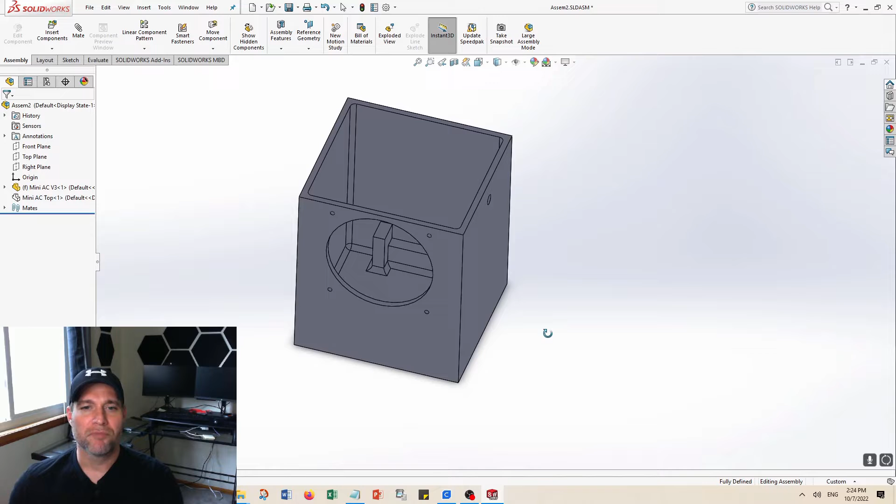So first I got to designing. Okay, so here's my design. I use SolidWorks and I'm a middling CAD designer, but I can do simple things like this. So here we have the enclosure itself. These are holes in the space for a large fan at the input. This is a hole for the power input. This ledge is where the heat sink sits, and the water of course here is at the bottom. And then that's about it.

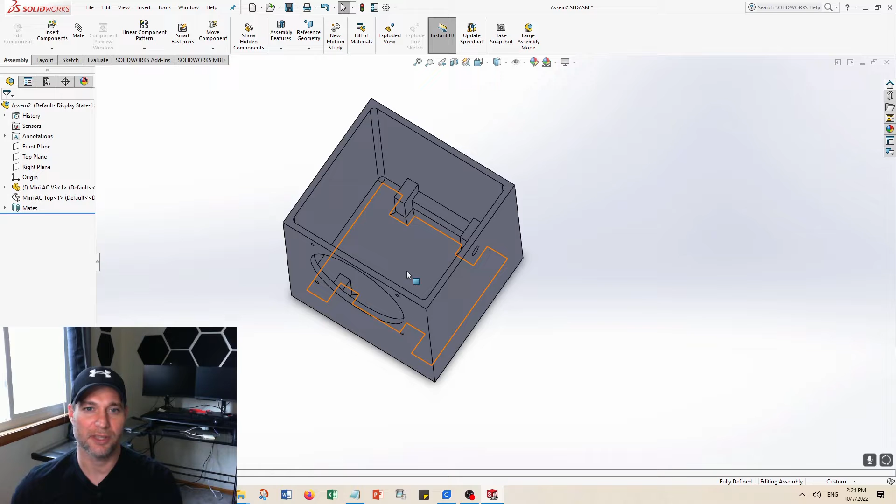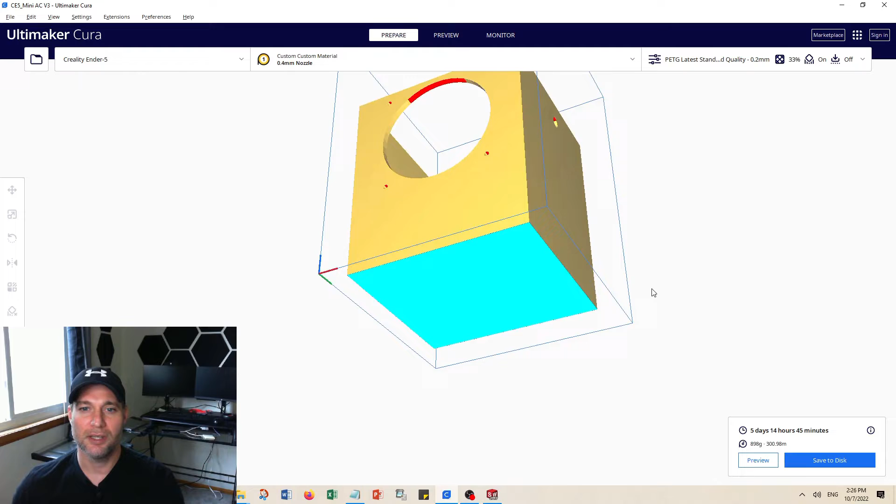And of course, I also designed a top, which you can see right here. So the top goes on there, and that's all it is. Pretty simple. Now I have a 3D printer that I'm going to use to print this box that I just designed. So here is the box in a program called Cura. I go ahead and I slice it.

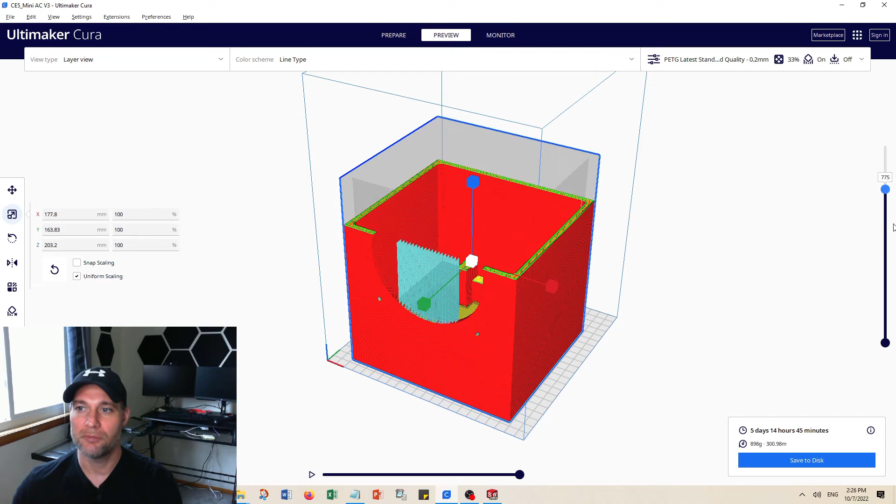Slice it means that I'm sending it to the printer and it's going to create these layers that build up on each other. So you can see how it builds from the bottom to the top. These light blue parts here are supports. You need supports when you have a big aperture like this. So this is what it's going to look like when it prints from the bottom to the top. And you see that it's going to take quite a long time. This is 5 days, 14 hours, 45 minutes. All right, here we go.

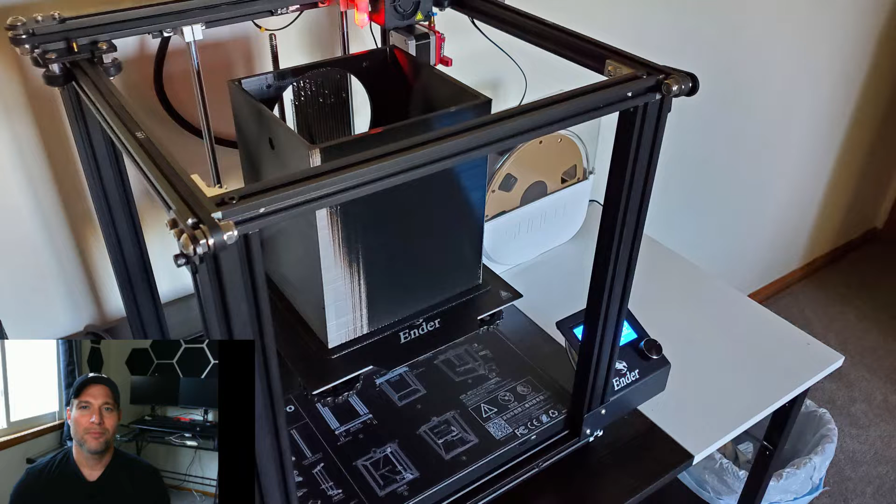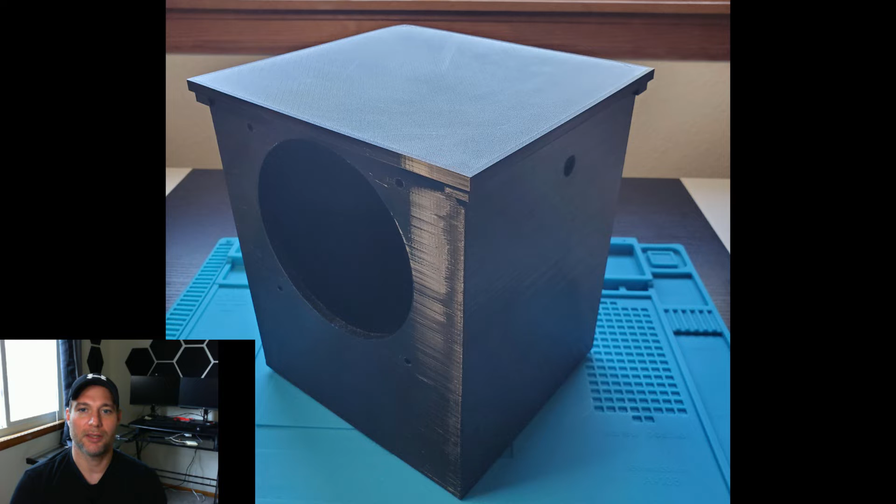Okay, so here you can see the box being printed on my printer. This is an Ender 5 Pro. I bought it a few years ago, works pretty good. And here you can see it at the very end, sitting on my table. I think it came out pretty good. So at this point, we're feeling pretty good about ourselves. Design went good. Print went good, even though it took forever.

So the first test: is this thing waterproof? Turns out, no it is not. Immediate fail. So the issue is that I used a material called PLA+, which turns out to be not waterproof. Didn't know that. So that's why we do these things. That's why we do these projects.

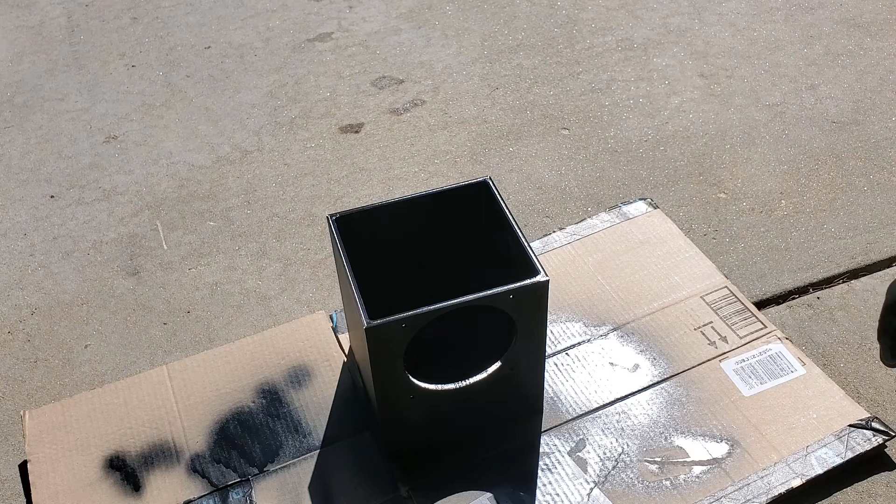If you're interested in how I do my 3D printing, the differences between materials, I can do another video on that later. But for now, we got to fix this. So time to get our Flex Seal out. Boom, dramatic entry. So Flex Seal, as seen on TV, this stuff really works. It's great for waterproofing anything that you need. Basically, it's sort of liquid plastic in a can, but it really does work.

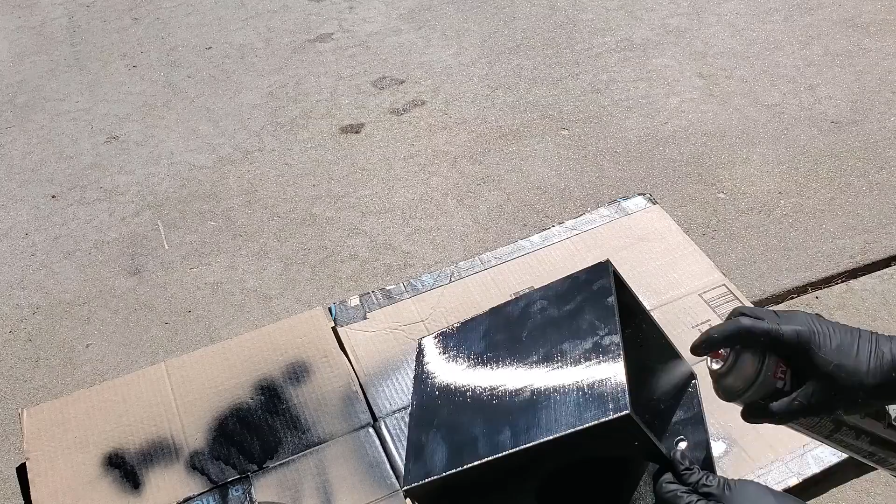So I'm gonna go ahead and start hosing this thing down. Got to make sure, a little test spray there. Make sure that you get every nook and cranny, of course, but the spray is real good at covering every inch. It is a little bit stringy. Got to make sure you get every side. Let's be thorough here. Okay, I'm not going to cut any corners. And then when you're done, why don't we go ahead and leave it out in the sun for a while? That couldn't hurt, right?

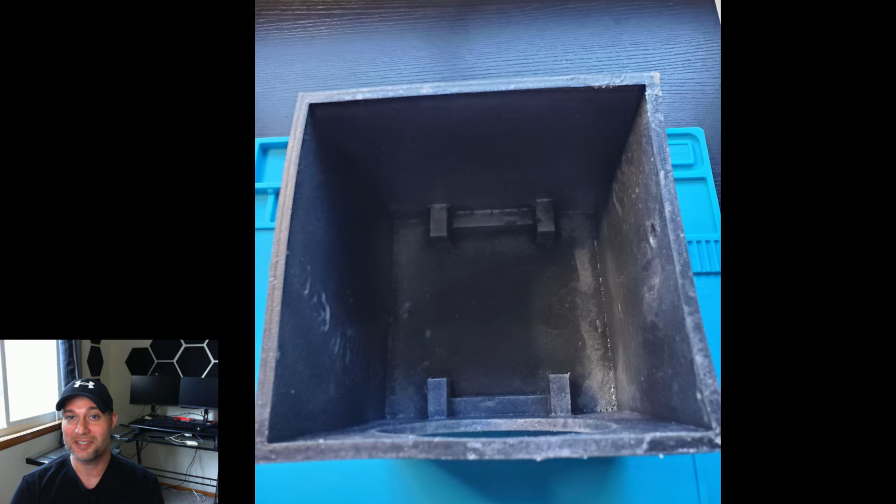Wrong. Okay, you thought that you were just going to leave this thing out in the sun. Take a look at this. It's all deformed, melted, pathetic looking. All right, this is not satisfactory. The problem here is that I left it in the hot sun for maybe, I don't know, 5 or 6 hours, and it turns out that PLA+ has a pretty low melting point. Didn't know that. Mistake number 2.

So I had to start over with the printing. This time I used a new material called PETG, which has a higher melting point. Let's see if this is any better. 6 days later. Actually, that was a lie. It was more like 30 days. This PETG material is a real pain to print with, but I finally got it working. Here's the end result. I think it turned out pretty good.

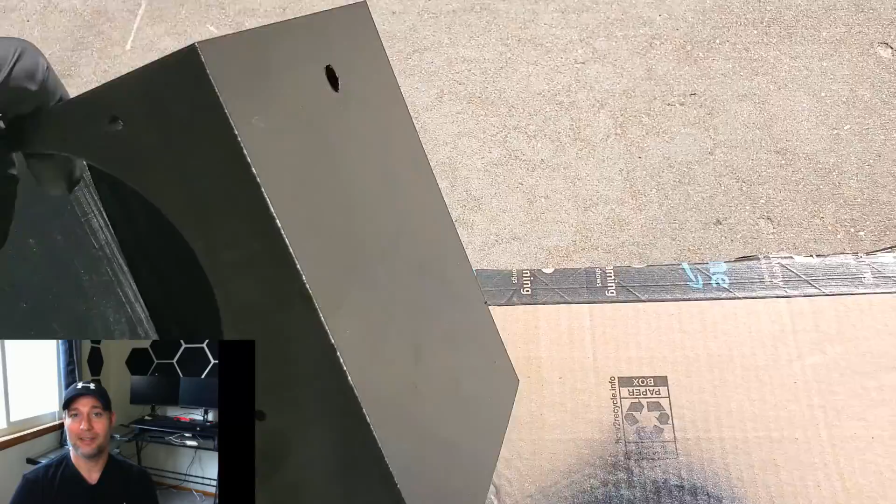All right, this video is getting a little bit long, so I'm gonna have a part 2 to this video where I actually construct the box and we'll see how it goes.